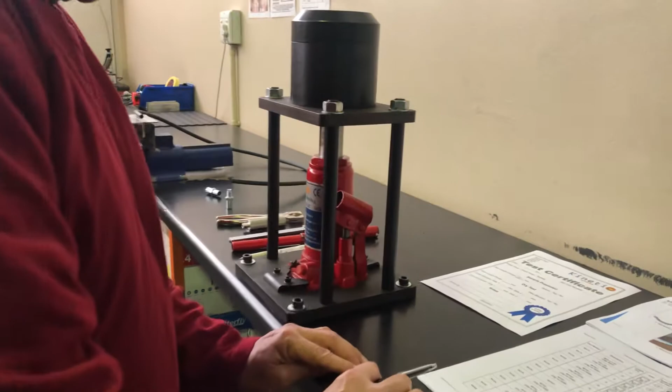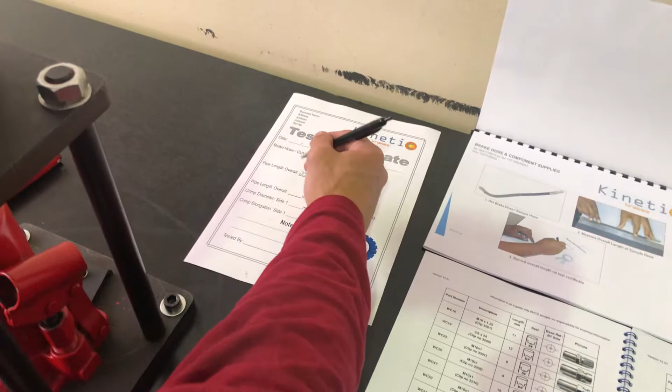Step number one is to measure our sample next to a rule or tape measure and record this length on our testing certificate, to check once it's been assembled, measures up correctly or very close to.

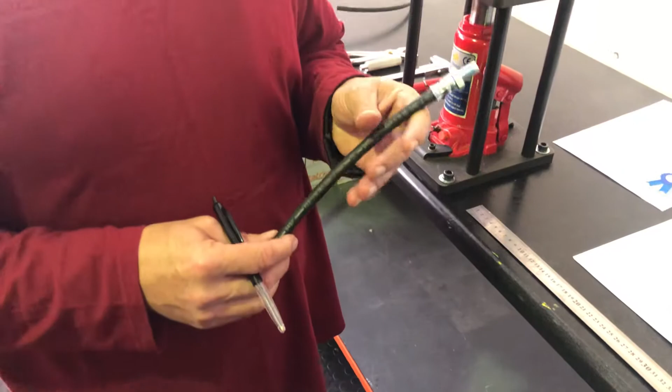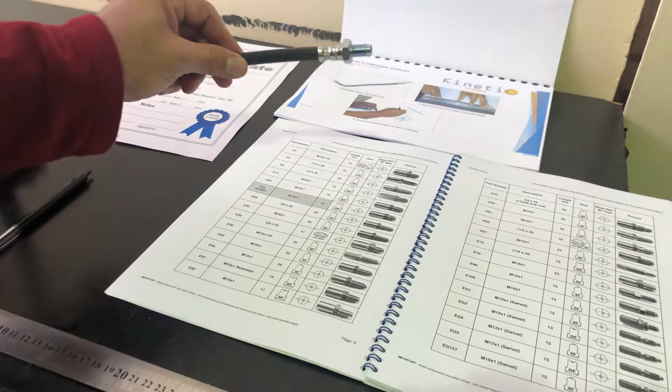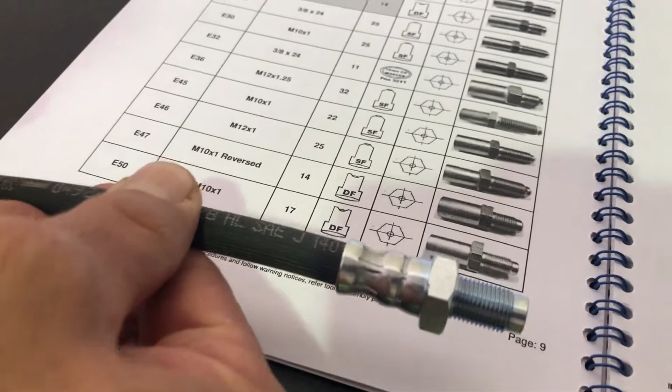Secondly, we need to identify the fittings. Step number one, in our catalog, we can check first fitting against images and compare. In this case, we have an E50, which looks very similar to our fitting M10 by 1. We can take our fitting out of stock to check shortly.

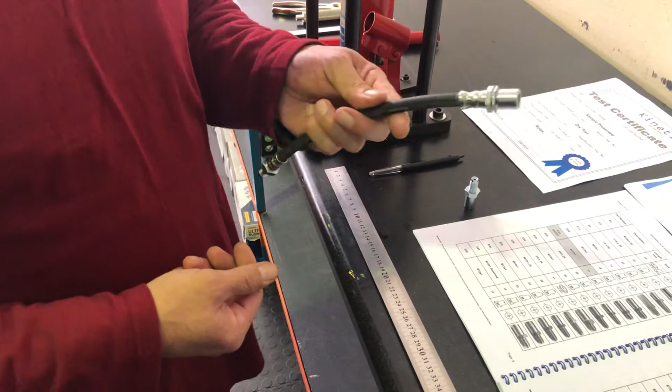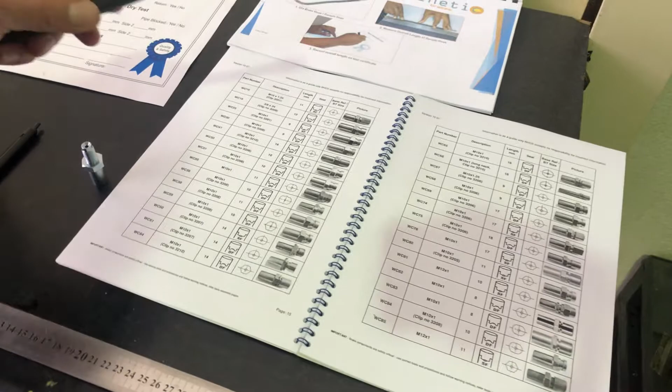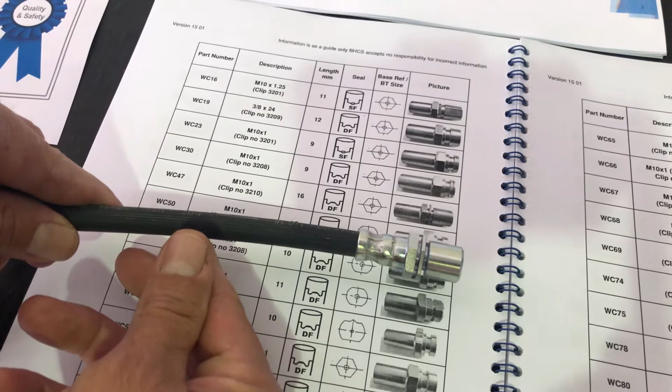Then we need to check the other side. We then see that this is a female fitting on the sample, and we go to the female section of fittings in our catalog. Again we compare, and we can see in this instance a WC47 M10 by 1 looks very similar to our fitting. We can take it out of our stock.

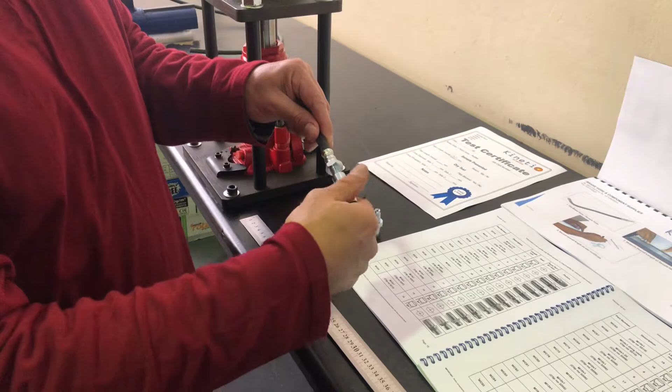Next, we have to check that the threads are correct. We can then take these fittings and screw them on to check, or use a thread gauge if you have one, to just make sure that the thread pitches are correct.

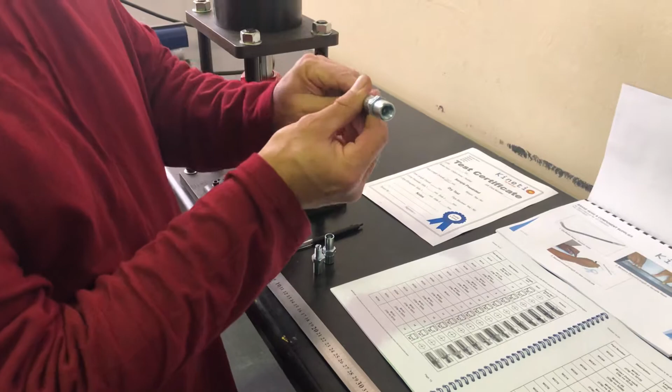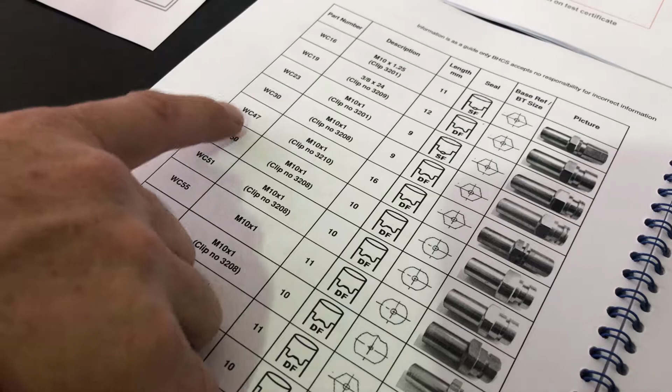We can also see inside the female whether it is a single flare or a double flare. In this case, it has an inverted double flare, and we can see in our catalog it shows double flare. So we are assured that this is the correct fitting to make up this assembly.

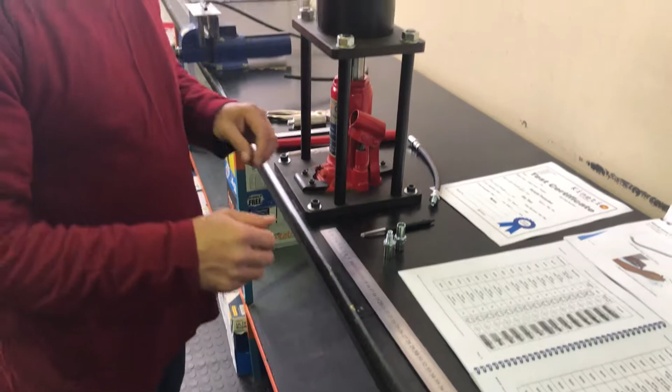We can now proceed to making up the brake hose. We start by ensuring that the hose that we are going to use has been cut square and is a clean cut.

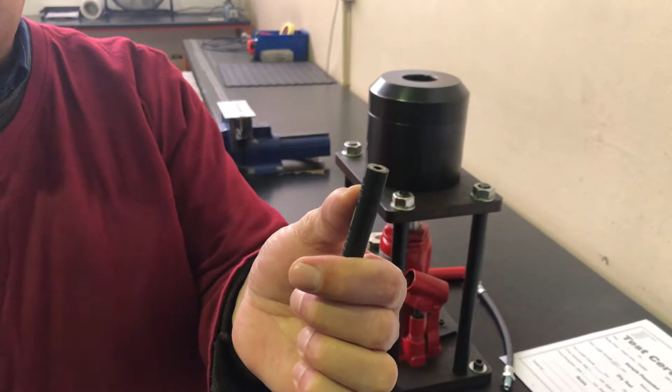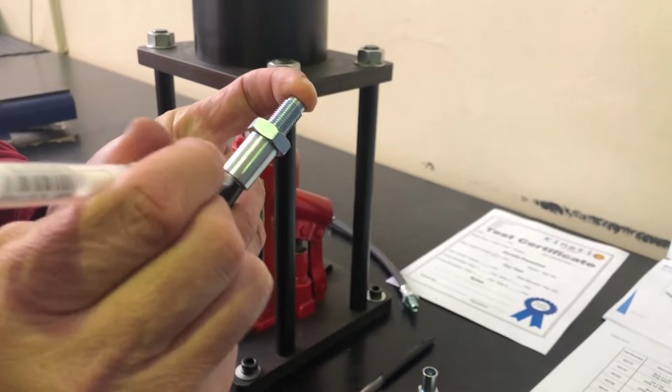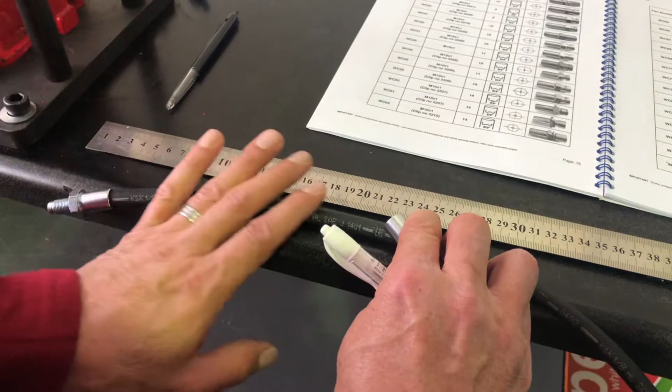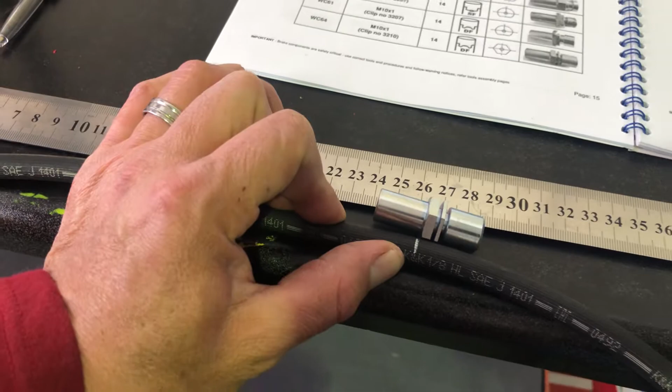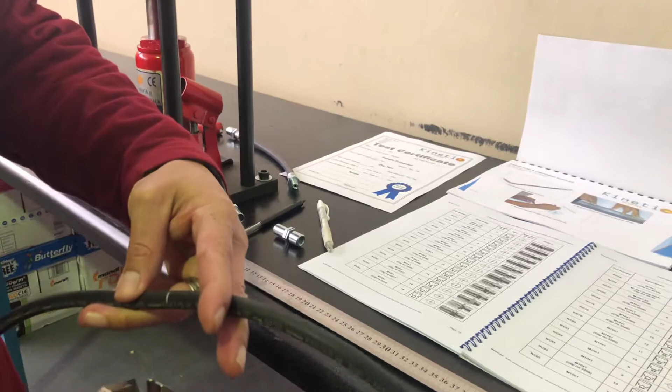We can now confidently cut the hose with our special TAE500 cutter, which is designed with a very sharp blade to cut right through the hose, ensuring a square, true, clean cut.

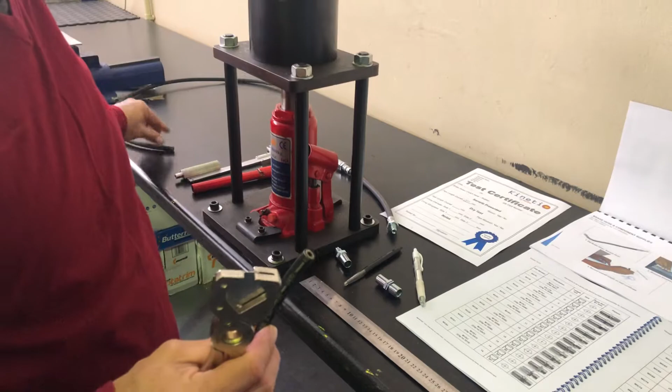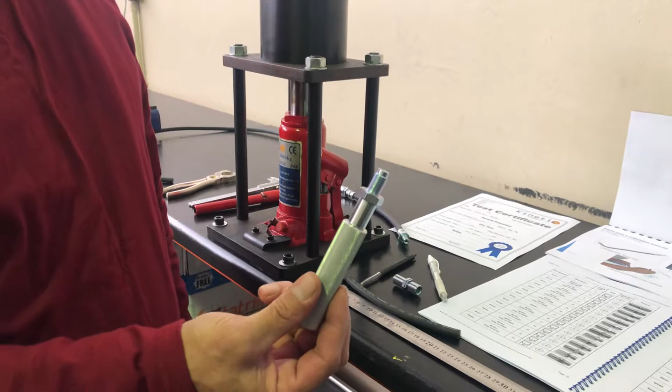The next step is, with our insert tool, we place the fitting on, which then gets put upside down in the crimper.

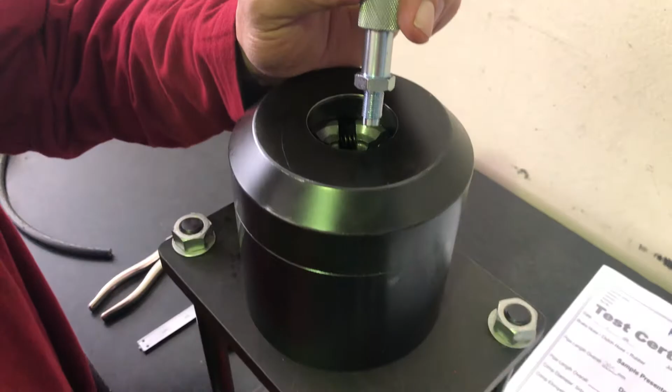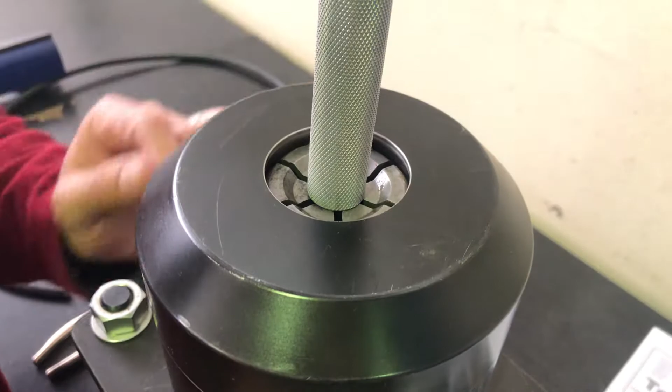Close the valve, crimp up. Make sure the hex is below the crimping surfaces, and we can rest the insert tool on top of the dies and bring the dies up to just hold the fitting.

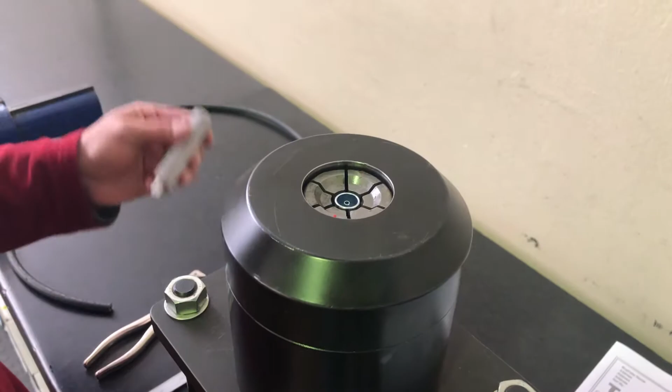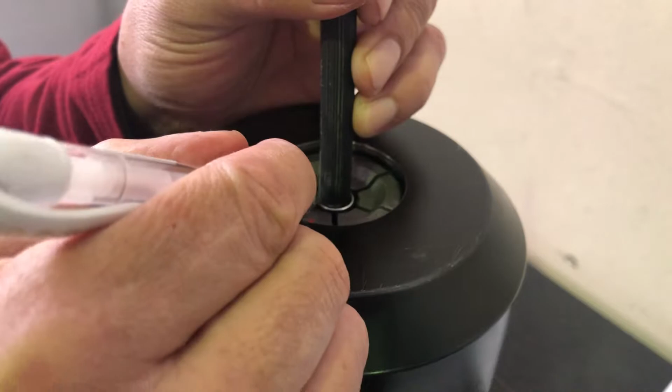We then remove our insert tool, and we can take our cut hose length into the fitting and make sure it's bottomed, and just make sure that elongation mark is still visible. We can now proceed to crimp.

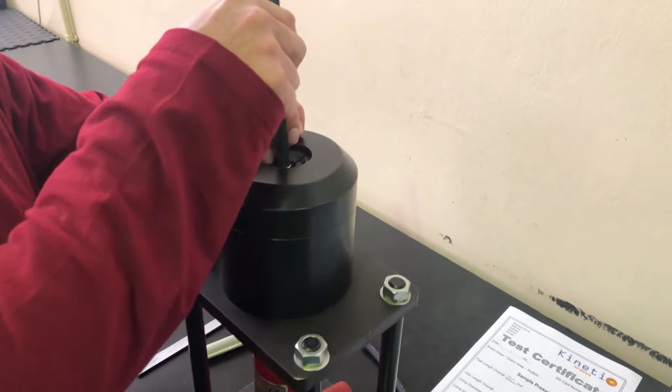The crimper is such that you will feel a positive stop, which is at the crimping 10.5 millimeter specification. If you find it's a little tight, you can just press it with your fingers to open the jaws, and then we must measure critically.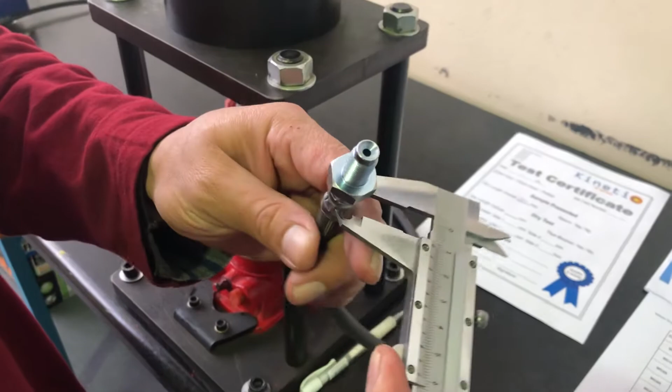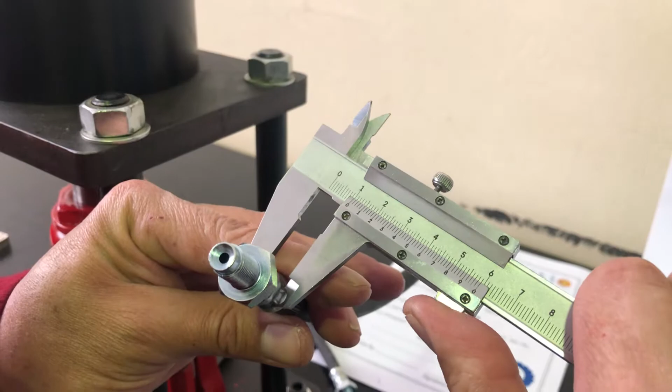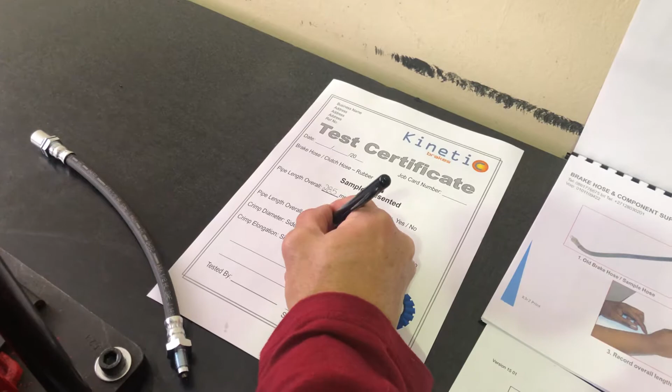So we have measured, in this case, 10.5 millimeters with our cutout vernier in the bell of the fitting across sides. We also need to, very importantly, check our elongation, and in this case it is 2 millimeters. We can record this: 10.5 millimeters, and elongation was 2 millimeters.

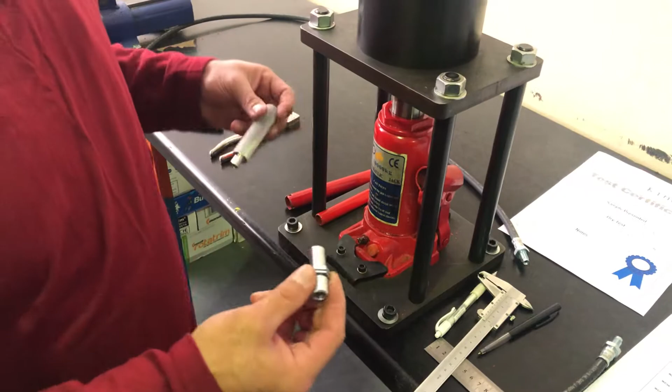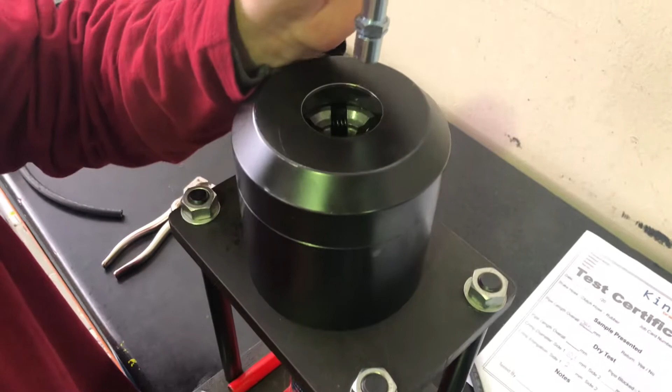We can now proceed to the second fitting. Again, we put the fitting onto the insert tool, upside down into our crimper, close the valve, again to the point where we can rest our insert tool on top of the dowels and bring our dowels to, again, just hold the fitting.

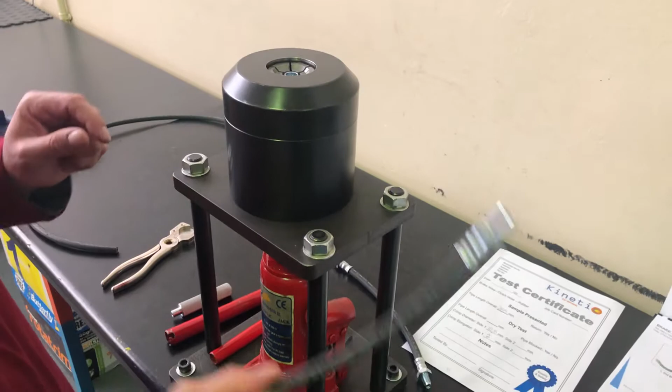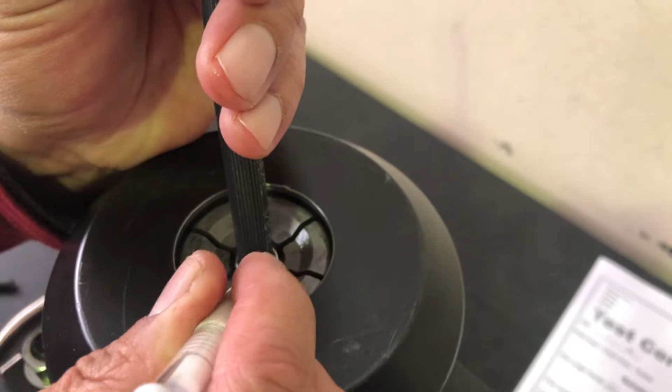You do not want to crimp it, because it will crimp your tool into the fitting. Remove it, which also keeps your fitting flush with the dowels. We can now insert the hose into the second side's fitting, and again, very importantly, mark the elongation. We can now proceed to crimp.

Again, we crimp until we can feel the positive stop. And we can release. Again, if it's a little tight, you can just press it with your fingers to release completely.

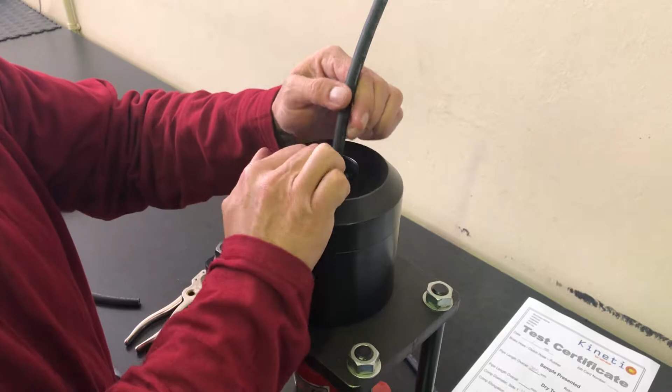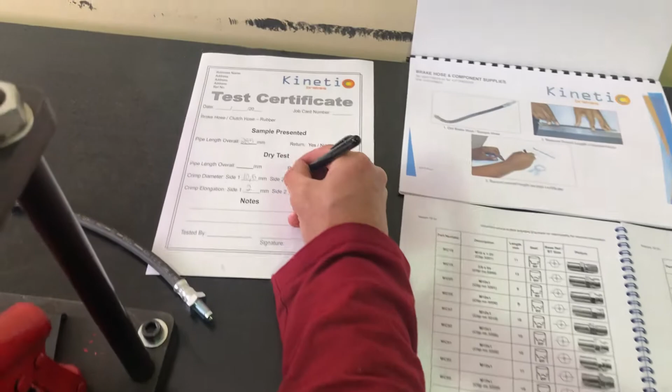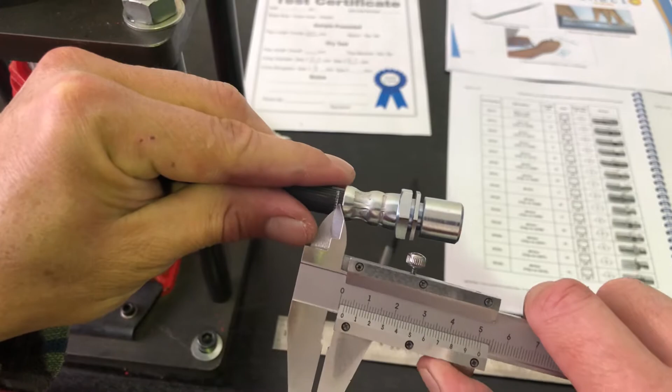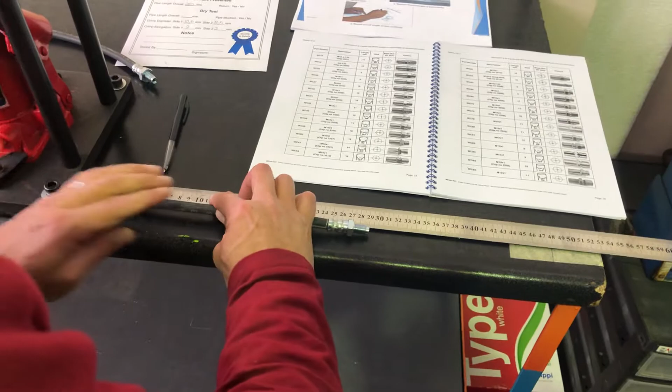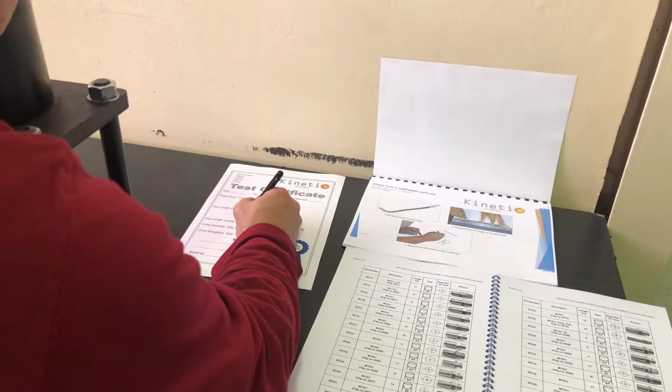Okay, we can then check our overall length, and we have now got 289 millimeters. We record this length on our certificate, as it is 4 millimeters longer than the original sample. 4 millimeters is absolutely acceptable for a brake hose. Longer, always longer, but never shorter.

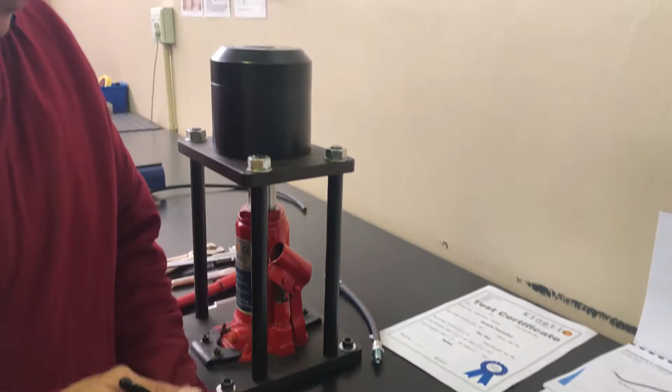So we can note that: hose 4 millimeters longer than sample.

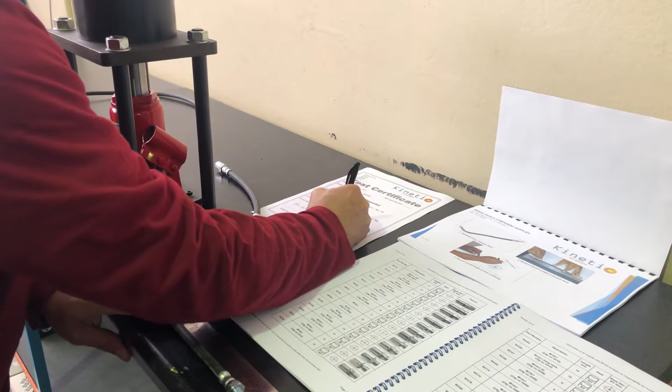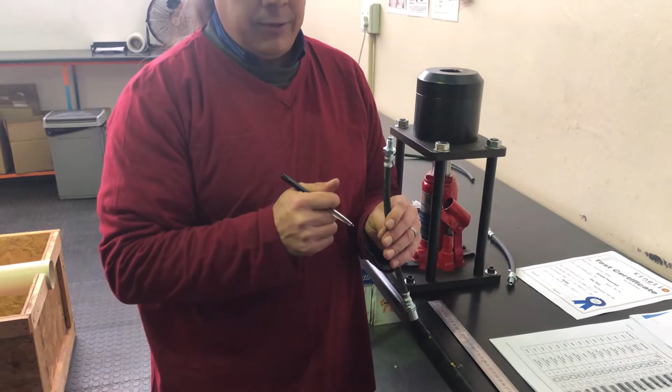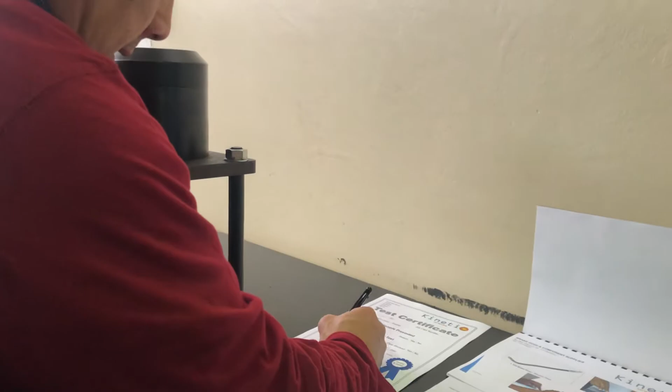We then have to check, either by compressor or by mouth, that the hose is free of blockage. We can now confidently sign. This was tested by Grant, and confidently sign it off.

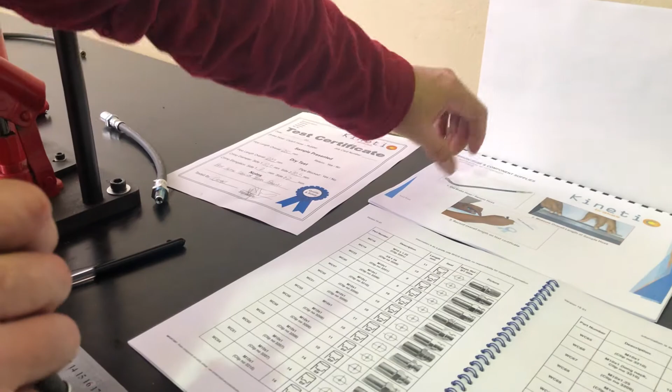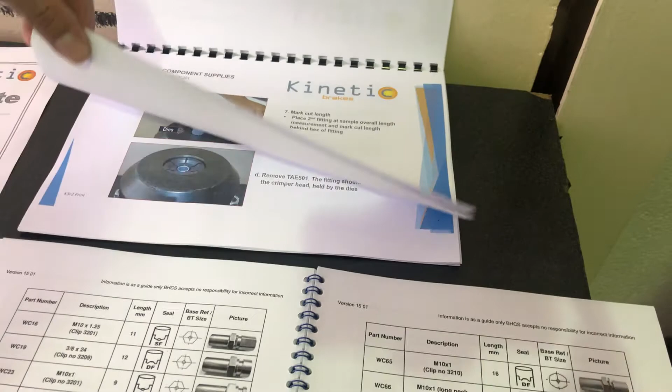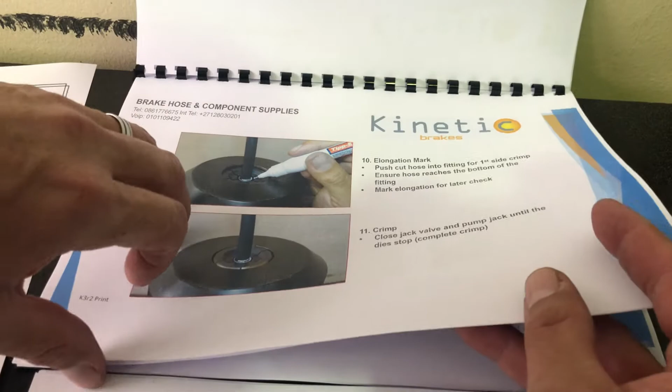We have our training manual, which is a step-by-step guide, as per in this demonstration, showing all the features of crimping and assembling a safety-critical part to sample using Kinetic brake hose and fittings.

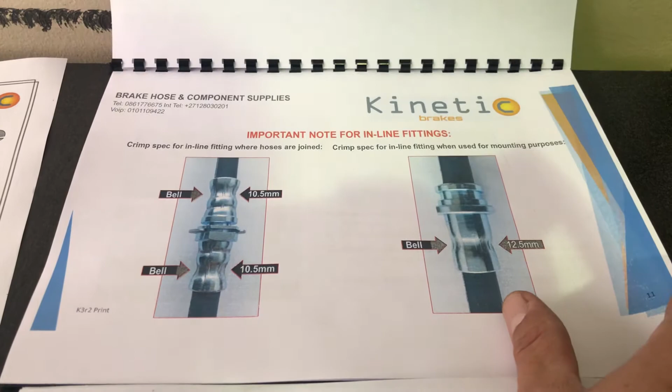10.5 millimeters and blow through your hose.

I thank you very much, and hope you will enjoy making up brake hoses and sending out quality product. Thank you.